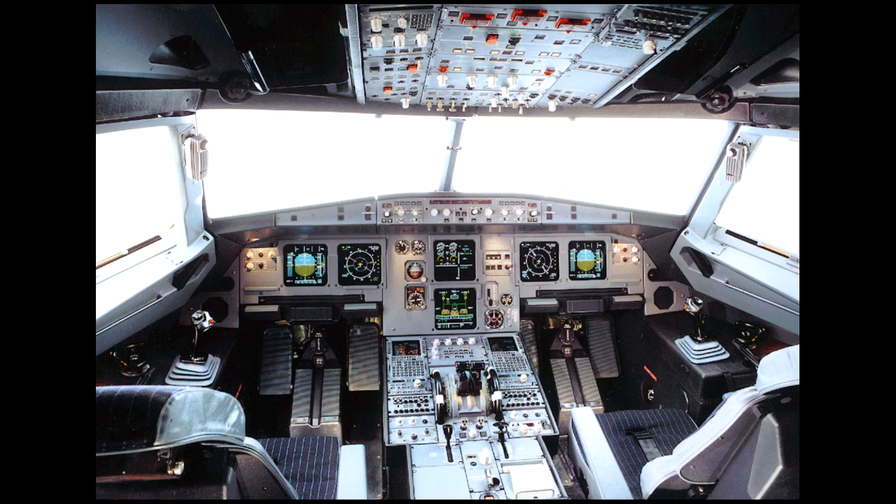Cancel the master caution.

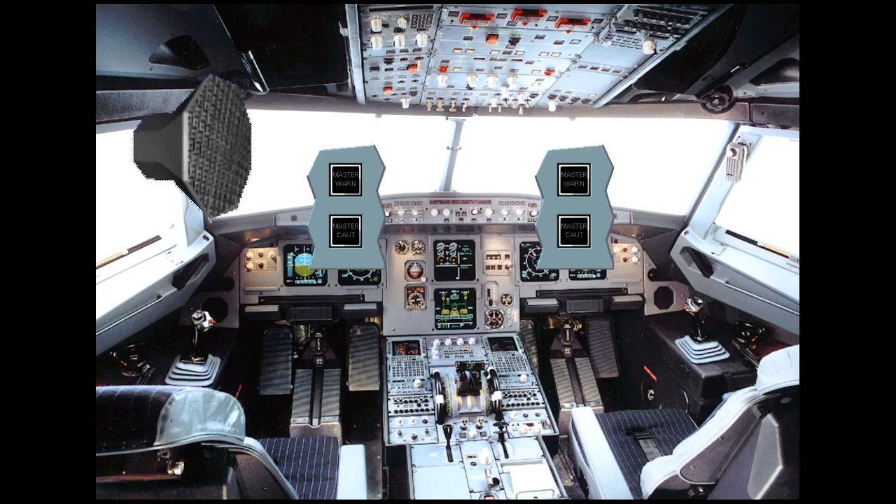Let's look at the fault indications: a fault message and associated checklist on the engine warning display. The ECAM bleed page has been automatically called to show amber indications, and a fault light has illuminated on the air conditioning control panel.

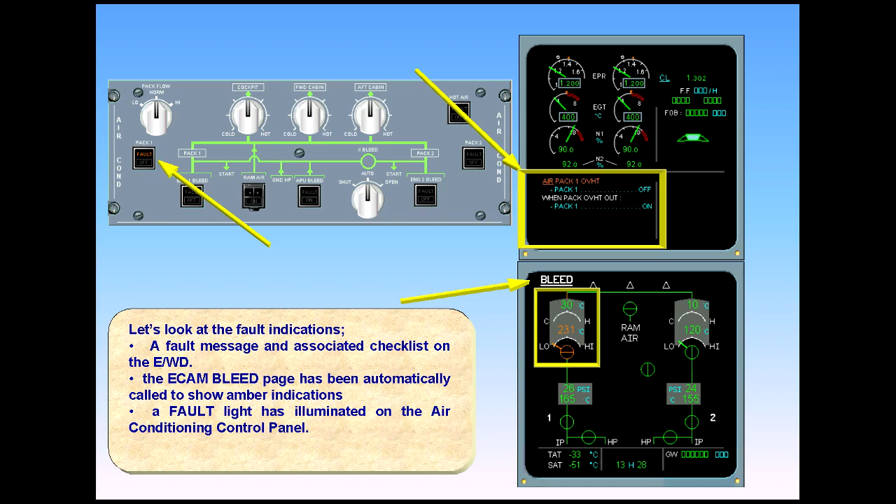On the EWD, read the title of the failure.

Before you begin, notice that the pack flow control valve has closed. This occurred automatically when the overheat was detected to protect the pack from damage. The valve color indication is amber because the valve position disagrees with the switch position. The compressor outlet temperature is also amber because the temperature limit has been exceeded.

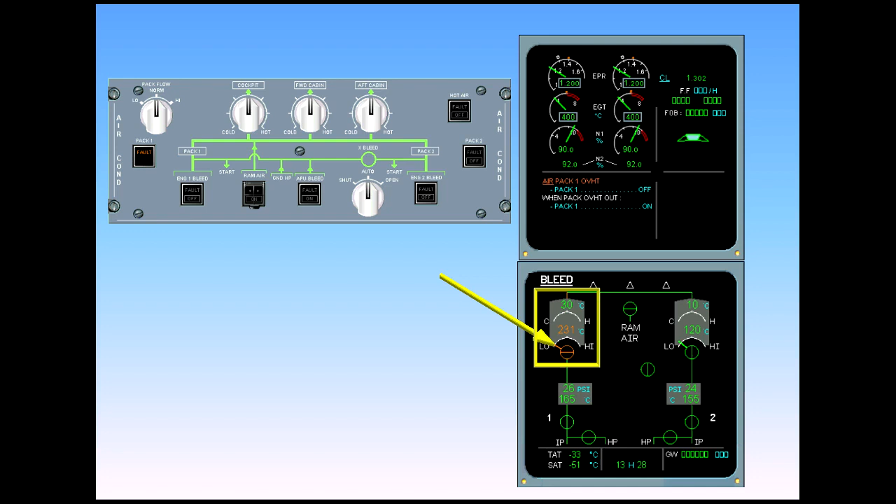Notice also that since the pack valve has closed, the supply line from the pack to the mixer unit has turned amber. This happens because there is no airflow from the pack to the mixing unit.

Read and perform the ECAM actions.

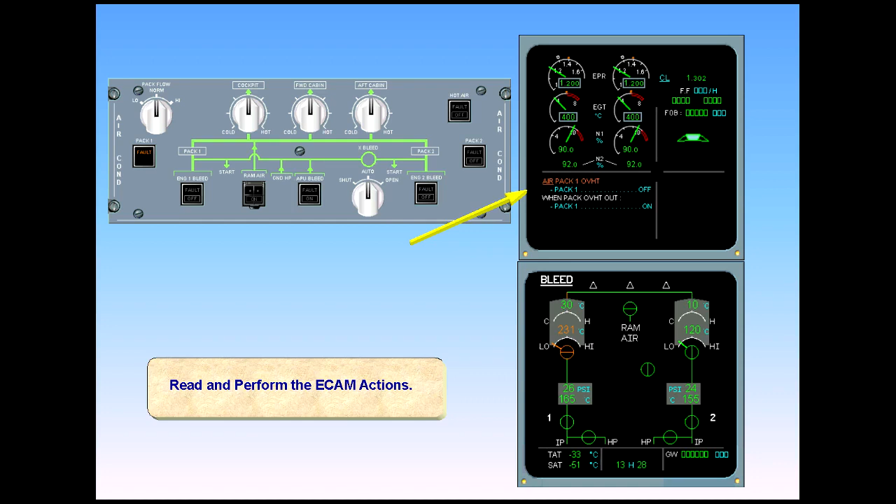The first step on ECAM directs you to turn off PACK 1. This is to match pack switch and pack valve position and prepare to reset the pack. Note that the fault light on the pack push-button switch is illuminated to help you locate it and to indicate the overheat condition. Switch off PACK 1.

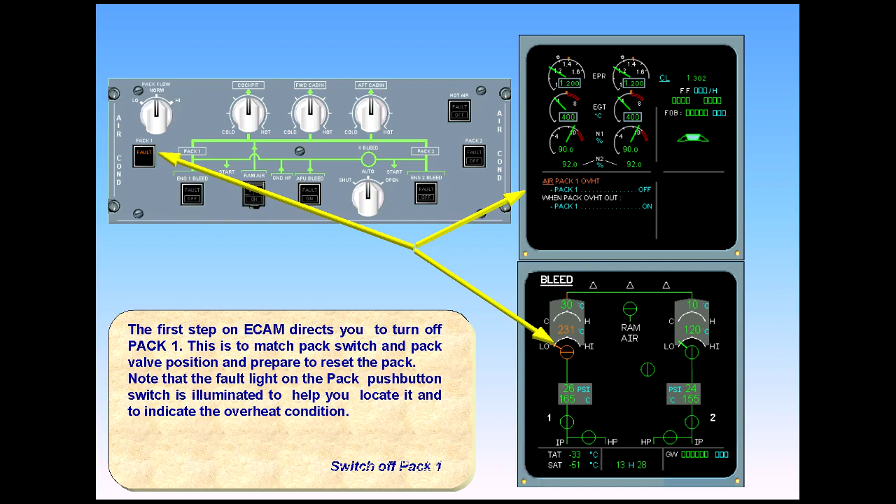When PACK 1 is turned off, an off light illuminates in the switch and the pack valve indication turns green, showing valve switch agreement. Notice that the fault light is still on.

The completed procedural step disappears from the engine warning display. Let's move on to the next step of the procedure, which has two parts.

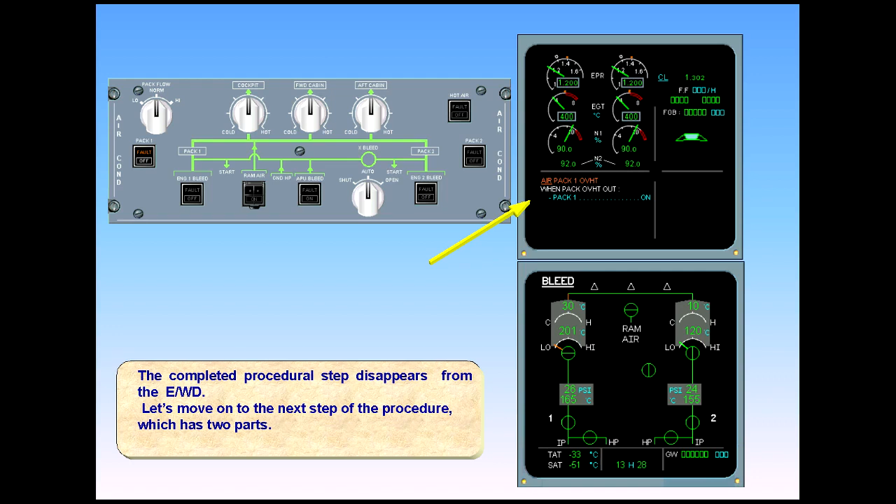The first part, a condition line, is not an action but an analysis. We are to determine if the pack overheat is out.

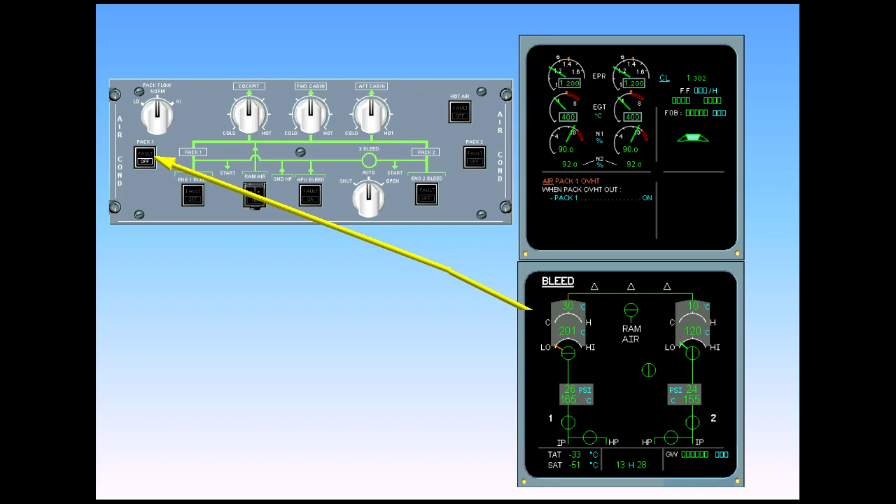The fault light in the switch is extinguished and the compressor outlet temperature indication is green, so we can conclude that the overheat is out.

Therefore, accomplish the next ECAM action by turning Pack 1 back on. Switch on Pack 1.

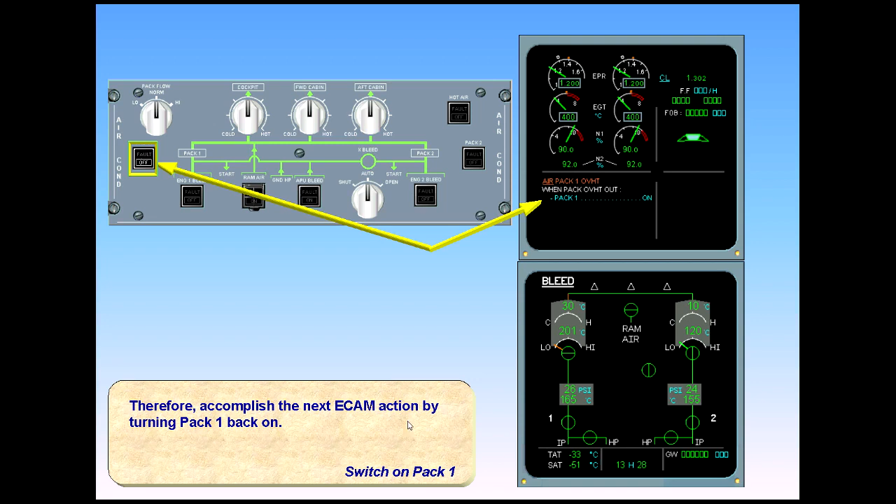When the pack switch is turned back on, the off light is extinguished. Normal memos replace the failure message on the EWD because the failure condition no longer exists, and the cruise page returns to the system display.

The failure message is read: Conditioning, trim air system fault.

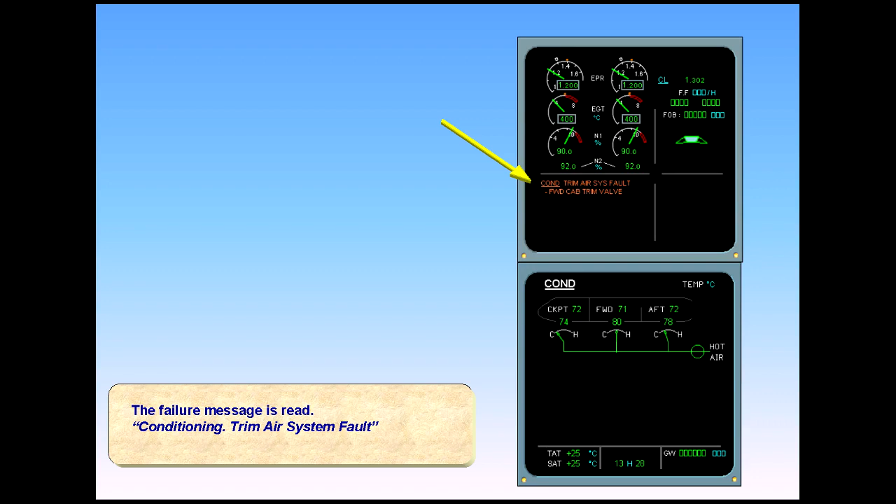The ECAM procedures are now followed. In the case of a trim air system fault, there is no action required by the crew.

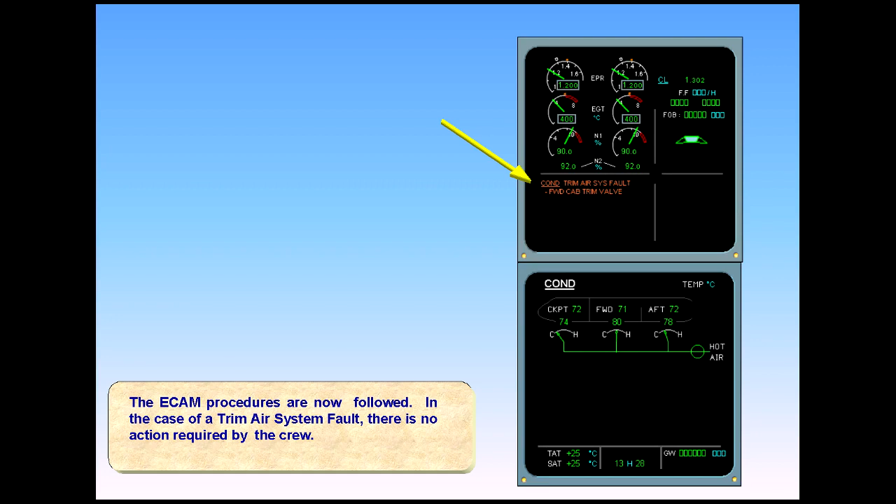The next step in this example is to clear ECAM. Clear ECAM.

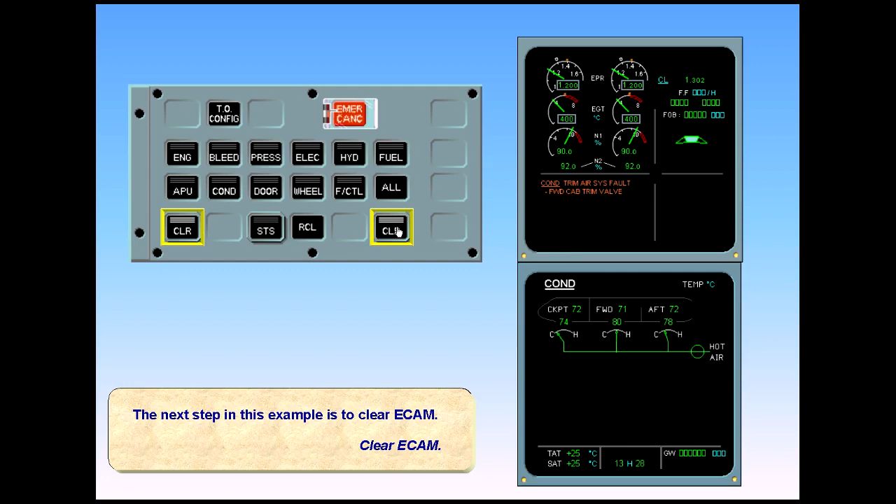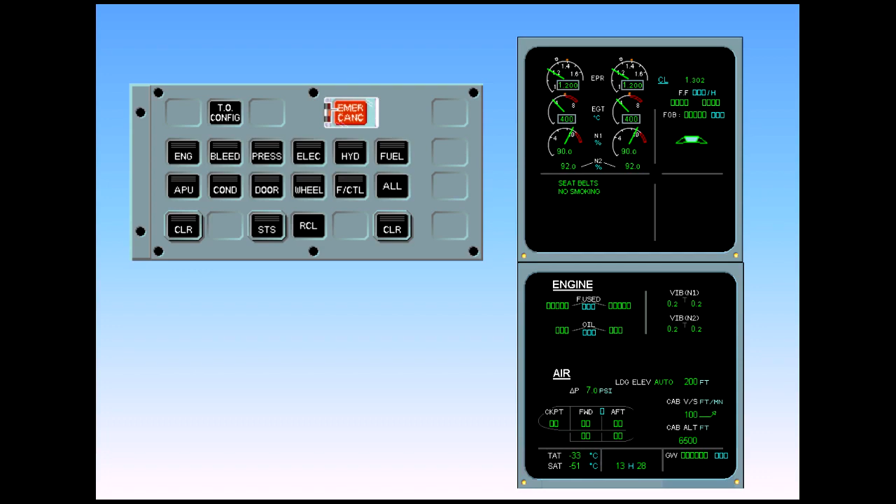Because this was just a crew awareness item and no action was required by the crew, no status page is displayed. The cruise page is now displayed and the clear lights are out. The ECAM procedure for a trim air fault is complete.

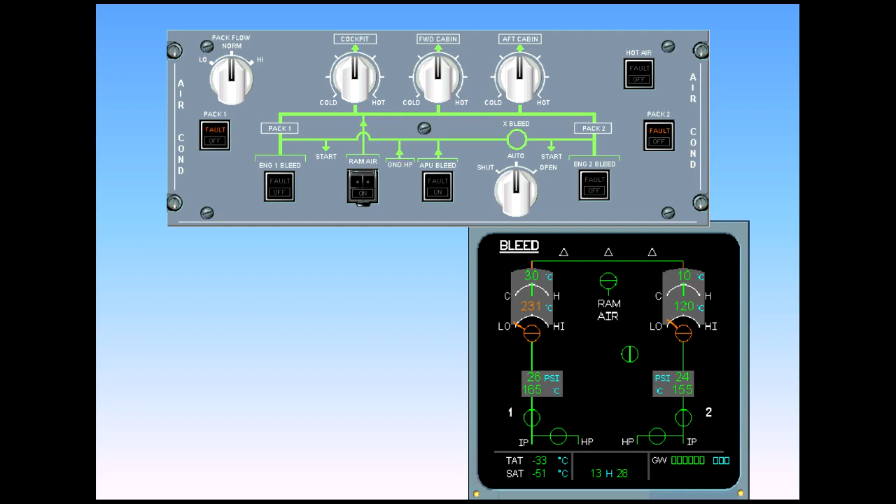Should an ECAM or QRH procedure require the use of the ram air switch, it is operated by lifting the guarded flap and pushing the switch. Select the ram air switch.

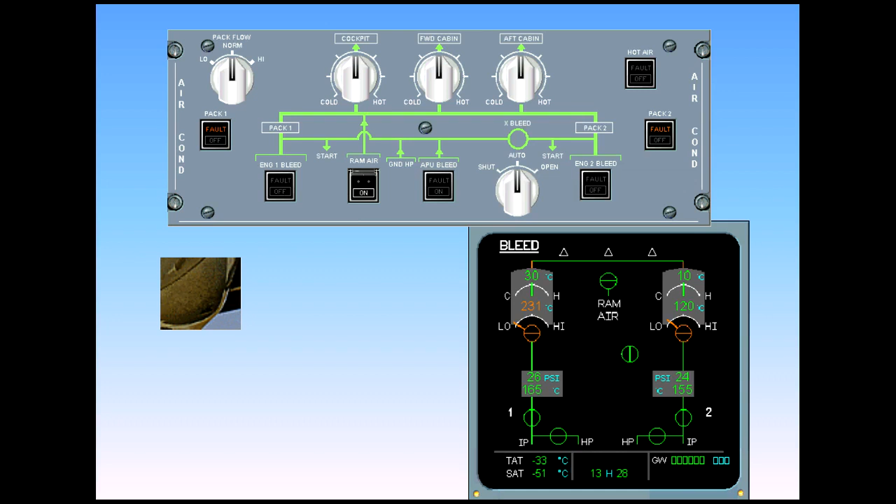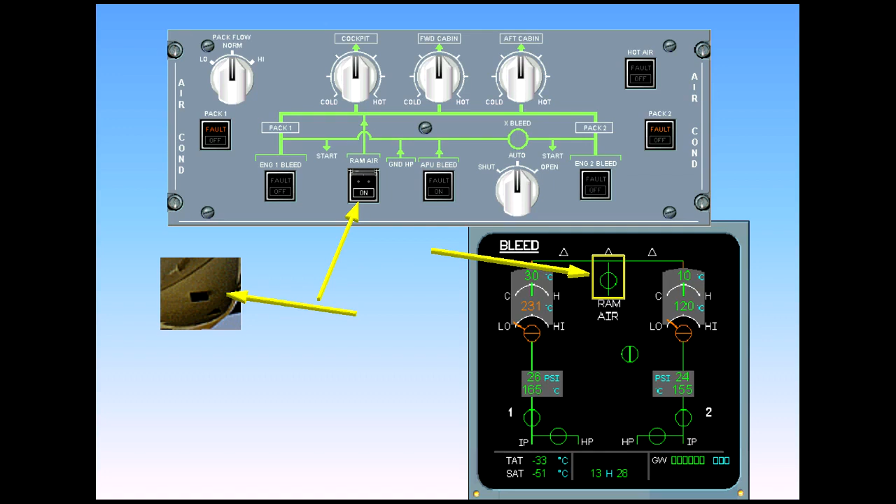An on light illuminates in the switch, the valve will open, and the indication on the ECAM bleed page will change to show this. Note that ECAM procedures normally call for the aircraft to be below flight level 100 minimum en route altitude before operating the ram air valve, since the aircraft will depressurize.

Let's look at another abnormal indication.

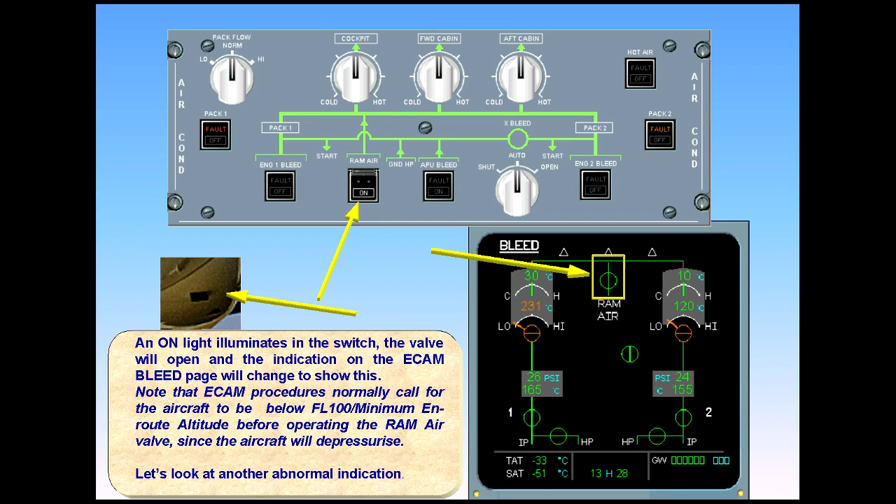The hot air fault light illuminates amber when a duct overheat is detected. If this occurs, the hot air pressure regulating valve and the trim air valves automatically close.

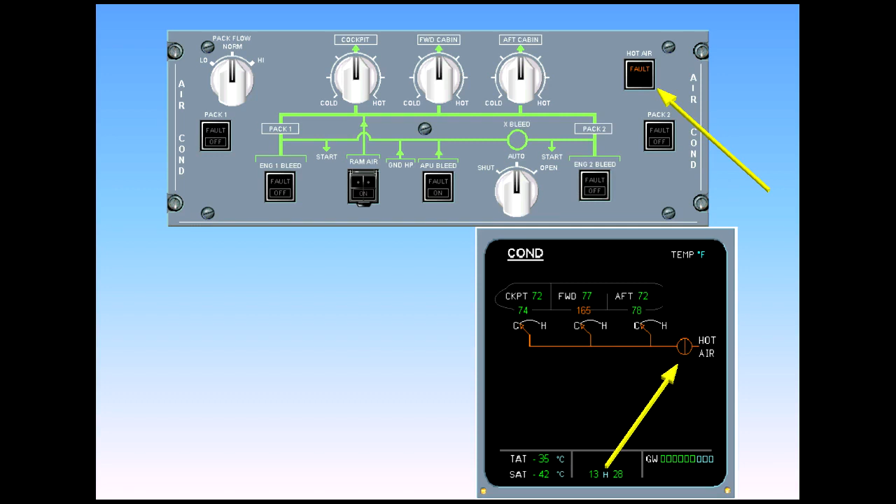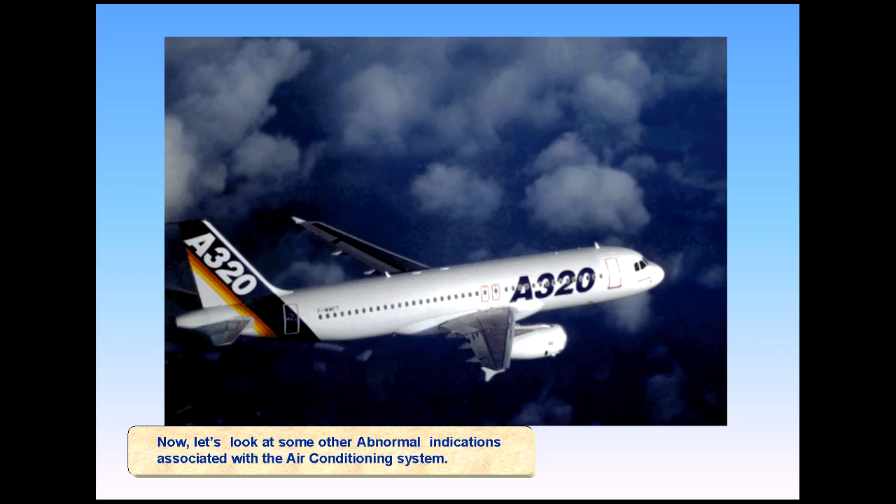Now let's look at some other abnormal indications associated with the air conditioning system. If a fault in a cabin recirculation fan is detected, the cabin fan indication is displayed in amber.

The zone control computer with 2 channels normally operates without any indications to the pilots. However, should a fault occur, there are backup modes of operation with associated indications.

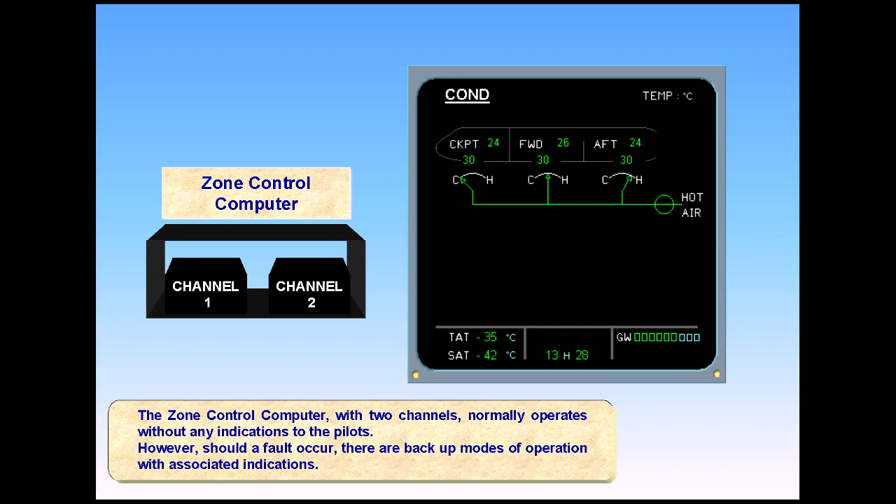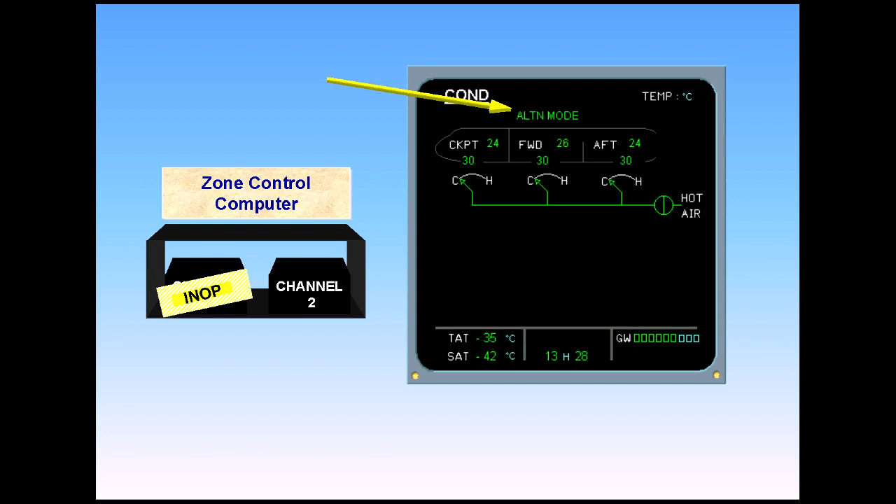In the first case, should a primary channel failure occur, the secondary channel takes over, and optimized temperature regulation is lost. An alternate mode message appears and the hot air and trim air valves close.

On the status page, you are advised that the cabin zone is at a fixed temperature.